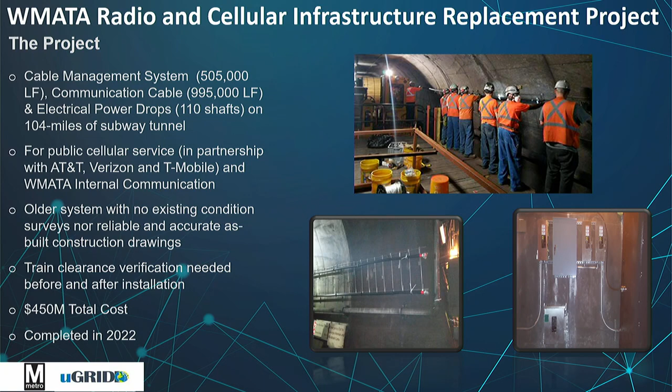The wiring then goes up the shaft and goes to a cell phone tower. That's how you get cell phone service in the tunnel, by making that connection. All right, so we have no existing condition. When they started to explain, yeah, you can go to the next one.

They started to explain their problem with the lengths of the cables and the positions, and immediately, because I was the chief surveyor for like 33 years there, I knew tunnel construction. I knew how the whole system worked. So I said, well, aren't you guys concerned about train clearances? And they go, well, yeah, but we think we don't need to worry about it. I said, well, let's do some theoretical calculations.

And they said, well, why do you say that, Don? And I said, well, do you think it would be a problem if a train hit a piece of cable that was 1,000 feet long and dragged it into the tunnel? And all of a sudden, boom, oh yeah, that would be a problem. Yeah, they could just see the headlines.

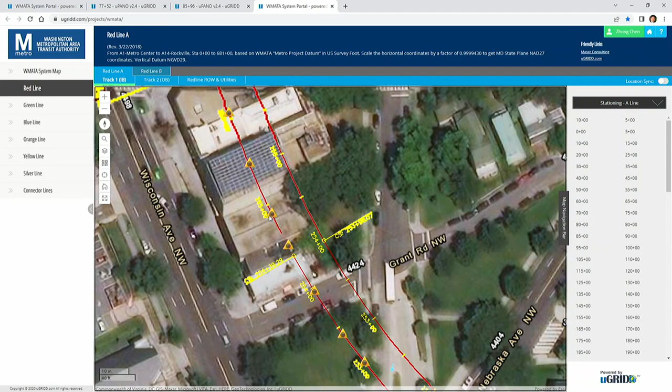So what you're going to see is a simple Google Earth type interface with an orthophoto on top. And there we go. Okay, simple interface and a simple way to navigate. What we liked about this was a normal human being could operate this system. Our track and structures people could operate it. So basically, you see a triangle wherever there's a scan. You see the track alignment. That was all computed by WMATA Geomatics. And then you can navigate.

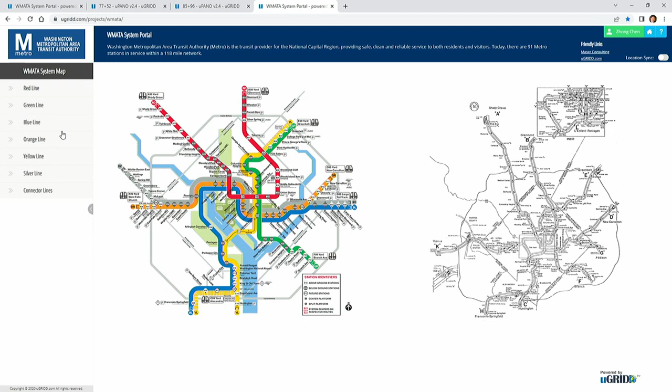Now, Zhong, can you go to the system map for a second? You guys have probably seen this if you've ridden the subway system. This is the map. We have colors for our different lines. So it made sense to use those colors, and so we put a table on the left-hand side of the screen that says, hey, you want to go to the green line, the blue line, whatever. So why don't we go to the green line?

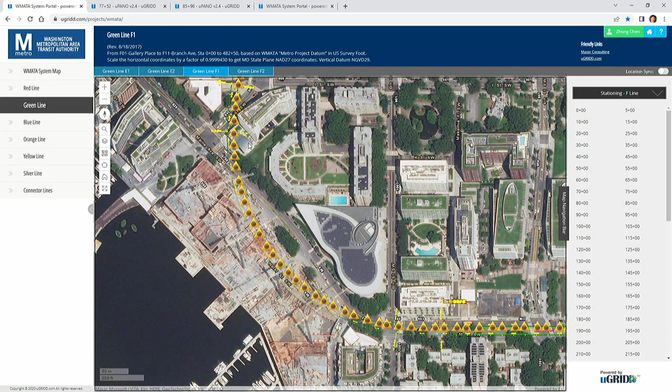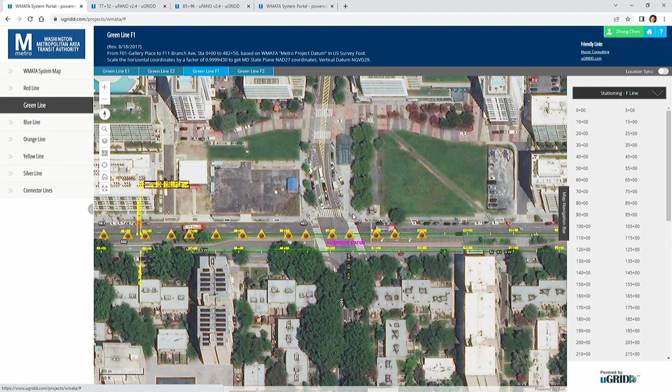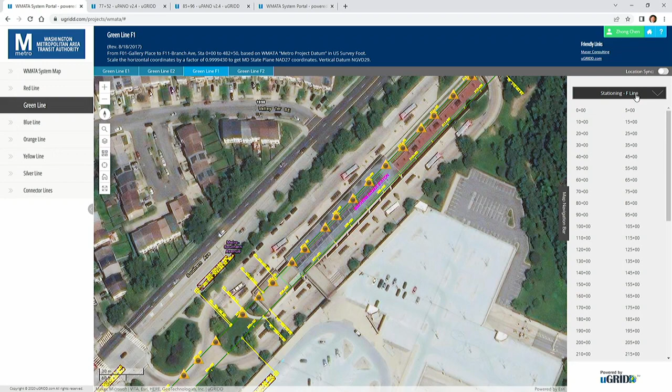And he came up with the little tabs on the top that show you how to get from track 1 to track 2. And then you can also search by stationing out on the right side if you knew what station you were interested in. Or if you wanted to go right to a station platform area, there's another selection right up there to go to a platform. Platforms are shown just superimposed on the surface. So we have 52 miles of dual track, all different configurations, circular, horseshoe, square, whatever. And so let's go underground.

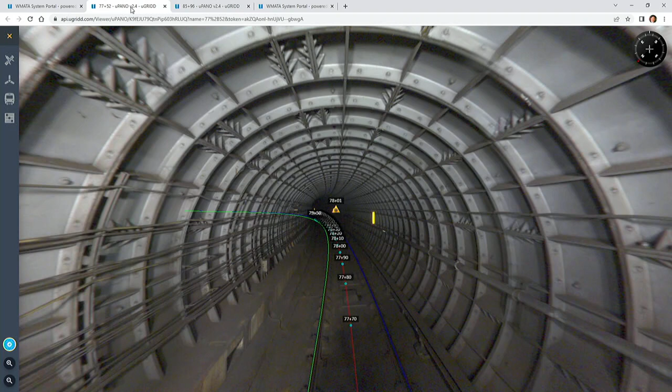So we're just picking the green line just because it's one of the newer sections. This is a section between, actually this is an old section of tunnel. This is a steel liner. And we don't build tunnels with steel liners anymore for a number of reasons. We're actually in the process of replacing or relining the tunnels underneath the Potomac River because they're just failing. So we're removing all the cables. But anyway, here's an irregular shaped surface.

And what you see on the center line of track in red is the center line of track. Stationing for convenience sake is shown every 10 feet. You'll see another triangle way off in the distance, and you can actually jump to that next scan. Now, once in there, now we're seeing a photograph, but right behind that photograph is the actual point cloud. We'll get to that in a second. You can pan left, right, up, down.

What I liked about this was that the people installing the snake tray could view an area and then could say, okay, well, we have track access in this location. Can we put snake tray or this cable management system in that area? And do we have to worry about anything? Because the data acquisition, they came to me after they had started the work. So they wanted to know where they could keep going and installing the management tray system.

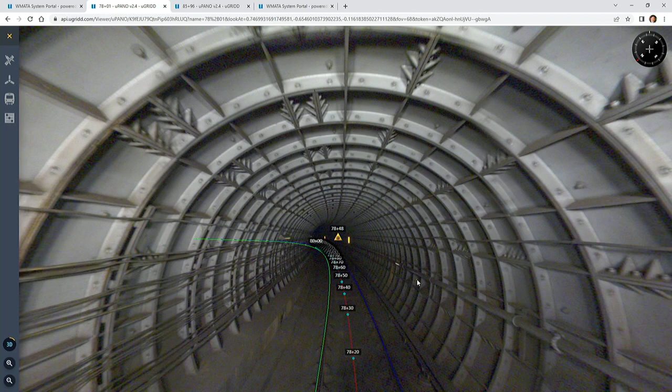So Jean comes to the table and says, hey, I think I can do something with your clearances. So he shows me this. Let's just pick a point, maybe on a pipe or something on the right side. He shows me this. Boink, here comes a station offset. You can see it on the left-hand side of the screen. Station offset and the coordinates of that point on the center line of track.

That's at the top of low rail or the grade profile line. And I can tell that it's a certain offset horizontally and vertically from the top of low rail. And notice that you can't really see it real well there, but that's the clearance envelope just popped up. And the clearance envelope, if you look on the right-hand side, there's a little red dot opposite the point he picked. That's a point radially closest to the point he just picked.

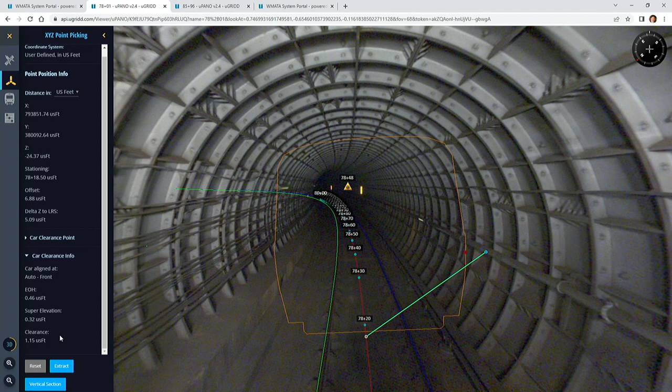That clearance information is shown over on the left-hand side of the screen. And I can't read the dimension, but it probably is in the range of a foot or so. So they knew that they could install the cable tray management system in that area as long as it was above that pipe. So they were able to keep going while the regular design, the 2D design drawings were being created, right?

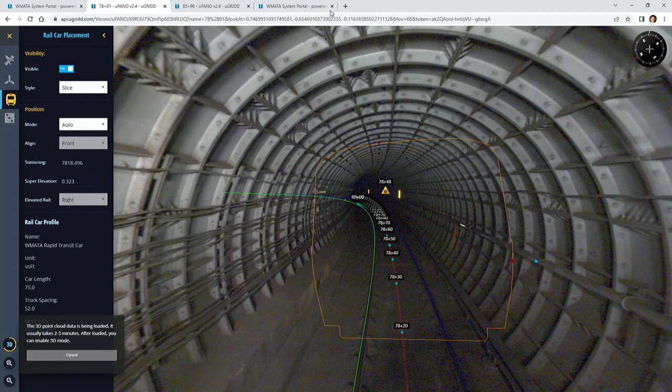So I think the other thing is, can we go to the point cloud? Or can you see it over there? So the point cloud, you could toggle between the photograph and the point cloud, and you got it? Okay. There's the scanner.

So here's the point cloud. Lots of detailed information. When he's clicking on the photograph, he's really clicking on a point behind the photograph, on one of these point cloud points. So this gave a lot of people that wanted to look into the tunnel, without going down into the trackway, the option of seeing what the tunnel looked like.

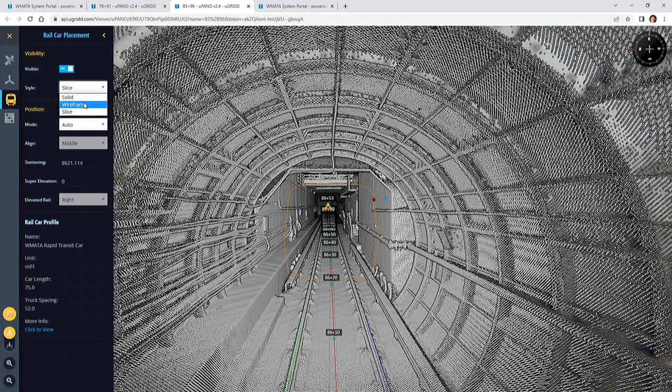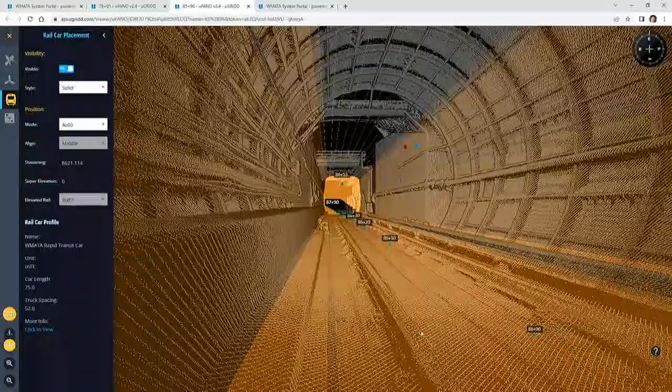Okay, well that's great. So the tunnel, now when we take people underground, and if I was a consultant and I wanted to go look at a small project, I would have to get my project manager to take down the tracks, get escorts, and get me trained and then walk me out there. Then all of a sudden, if Todd's another consultant, he just happens to have another task order, he needs to get down into the trackway. So we saved the authority millions of dollars by limiting the number of people that go into the trackway. Safety is number one at Metro these days.

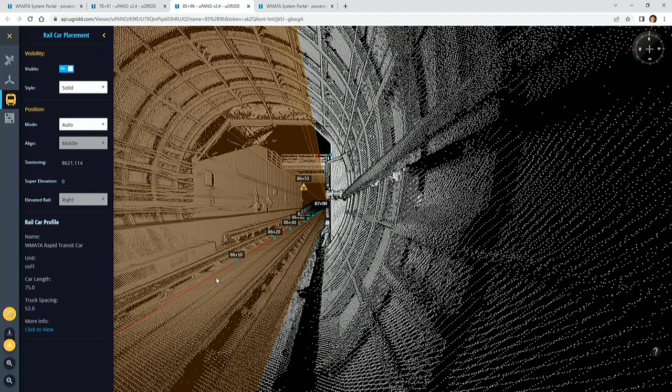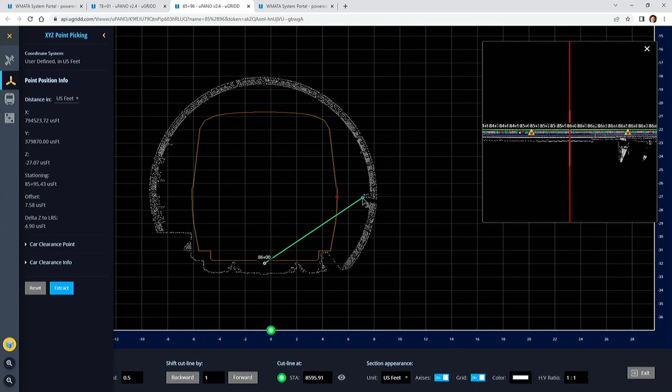Okay, but now we have data that we have to share amongst these 45 different stakeholders. And, okay, thank you. And so, I don't know if you saw, when he jumped from the surface view to the underground view, there was a view button, but there's also a download button. So we end up with 4 terabytes of data. We have to share it with all these different stakeholders.

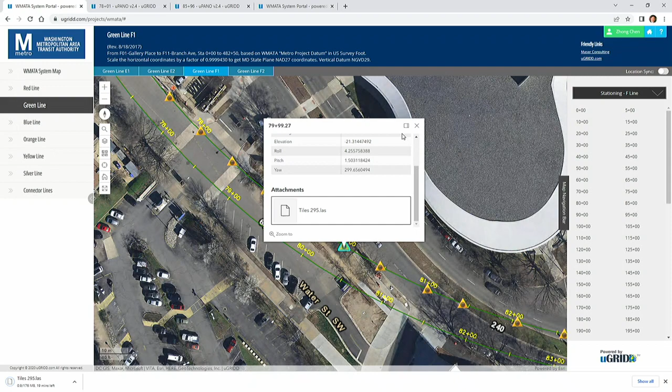Some of them needed the data to do their own design analysis, especially where we were transitioning over the top of a train. And so we found this to be an efficient way to update the data and share it with all the people that needed to have it. So it accomplished that need. Now, for those designs that required the exact computations needed for the length of a cable, that was done in a different system. But the fact is that we were able to order these cables in specified lengths to install them in the tunnel.

So I think there's one more slide, right? Do we have one more? You want to share the story about it?

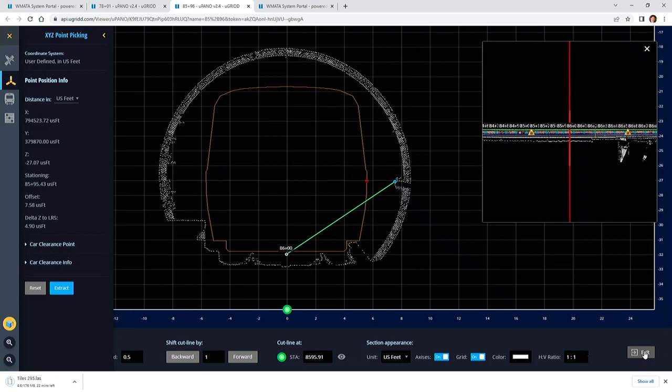Oh yeah. So all this occurred 6, 7, 8 years ago. We started it, and so the other day, somebody calls me up and says, "Hey, I'm looking for LiDAR drawings," and I go, "Well, I don't know what that is exactly, but what are you going to do with it?" And they say, "Well, we're replacing the emergency trip stations throughout the entire system." That's a little box with a blue light on it every 800 feet through the system. You hit the button on this thing and it kills the power. It's not for the general public to be running down the tunnel and killing the power.

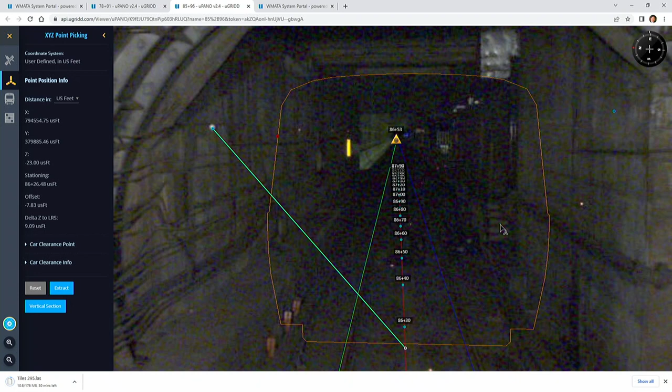But they're replacing them, and they said, well, we need to know, same problem, where we can route the cables and where we can install these boxes while we keep the existing system in place. So 8 years later, we're still using the data. I'd love to have mobile mapped it maybe every 3 or 4 years. We did that mobile mapping project in 11 nights, which is pretty phenomenal once you got everything coordinated. But we had to have exclusive track rights, had to be the first one out of the chute.

All right, is there one more slide? I think we're out of time here.

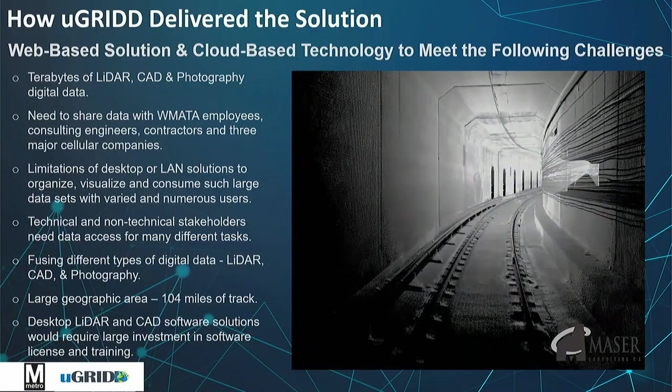Okay, so we're sharing the data with many people. Our track and structures people love this data because they can then look at it and see what the current configuration is. We had this huge geographical area to cover. We didn't do the open sky segments of the Metro Rail. And then we are updating this data with static scans as well as scans being done with an Amberg sled.

I don't know if anybody knows what one of those are, but the Amberg Technologies group has a track sled that you push along that measures 2 million points a second with very serious accuracies. So we're constantly updating the data and we're sharing it. So I'm pretty sure that wraps it up. Is there anything else that I missed there?

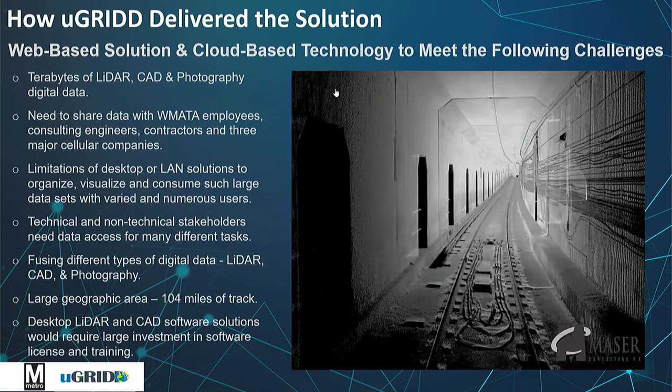So thank you very much. Oh, that was great, Don. Thank you. And as a user of Metro, thank you. I like using my cell phone. Okay. So I think we have time for a question or two for the gang here.

All right. So looking at some of this data, it's integrated with some pretty high-tech survey equipment. What's kind of the entry level if you want to use a system like uGRIDD on the project? Do you need to have full mobile LiDAR, or is there a place you can exist with maybe some high-level scans with some 360 imagery? Is there like a threshold you have to cross to get to that point?

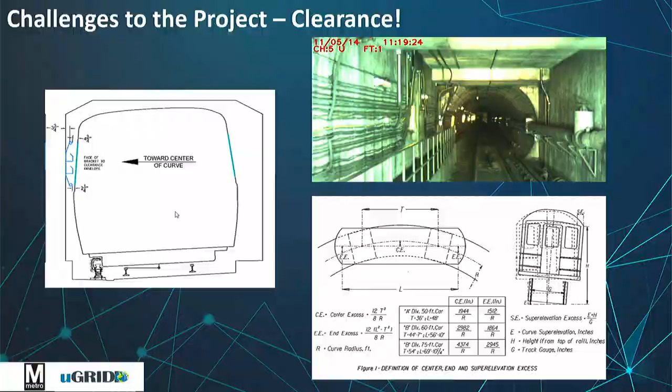From my perspective, anything could be used. A static photograph. The backbone is the alignment. So as long as you can give a station offset or some kind of geolocation on that image, it could be a scan, it could be a PDF, it could be anything. We just happen to be mobile mapping. Now you could go down there with other scanning devices. We did have very sophisticated survey equipment, providing control, plus all the scanning equipment. But we had the justification for the use of that kind of stuff.

But pretty much anything, you could put all your as-built drawings and have them linked to that track as long as you knew where they were. We haven't done that yet. We're just using it. And he's still under contract with WMATA to provide services as needed for future endeavors.

Yes. Sure, David. So I know they've explained it to me, but maybe just for the benefit of others, how does uGRIDD pull the data from disparate data standards, I guess I'll call it, into one place where, based on your need, you can look at various pieces of information? That's my understanding of part of what's happening, right, John? Yes. So how does it do that? It's not IFC based, so how does it do it?

Well, as introduced, I have a consulting background. I'm a licensed land surveyor, licensed civil engineer, and worked on a few hundred of these projects. Then once we started thinking to develop uGRIDD, the trigger was obviously the LiDAR data. And also my consulting practice started doing LiDAR back in 2000, 2001, 2002. So with all of that, how to deliver all of these different data components in one place. So uGRIDD has a slogan, everything is somewhere, namely georeferencing it.

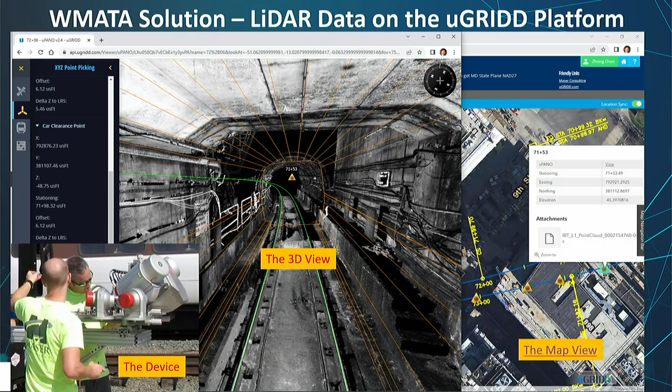All right, next up, we have another great presentation from Austin Holliman and Morgan Ballard from Tennessee DOT. They're going to be talking about culverts. Austin leads a team developing asset data collection, asset condition management, culvert inventory, condition asset program, and also takes care of the FHWA emergency relief program. And Morgan, in addition to administering the call center for the TDOT fix phone number, developed the reporting tools for the new culvert inspection program, and does a whole bunch of other stuff in the maintenance division. So I'll turn it over to you. Get you plugged in and ready to go.

All right, thank you so much. All right, let's see, that came up. Hold on, let's see if we can do this really quick so we can have our notes up here. I made it angry. All right, so I got a mark. Thank you, though. There was one of those things down the floor to help you with the notes, but we got it sorted out now.

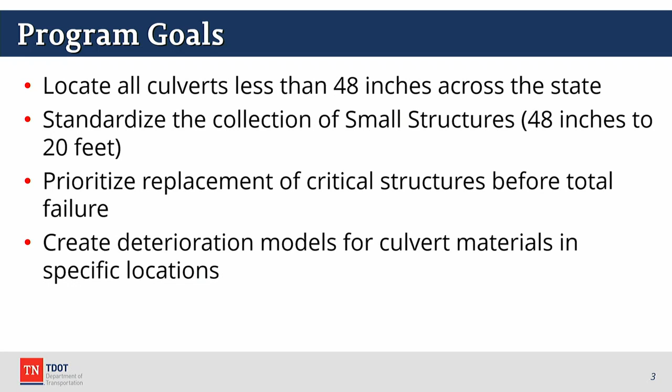One of the things that we really want to do is create a deterioration model for these culverts based on material, based on the location that we're putting those culverts back in. We'll talk a little bit more about that at the end. So we're going to walk through the actual culvert collection process and the major steps that we have in it. So sit back, relax, and let's take a stroll through culvert land.

So the first thing, it's really interesting, but TDOT just didn't have a location of any of these culverts. There was a survey done, I think back in the early 2000s, 2010 timeframe, but it hadn't been kept up to date. There was a couple pockets that had culvert information in spreadsheets, but it was really hit and miss on what you could find out there.

They could see where the ditches were going down into this, and they're like, we think there's a culvert down there. So they tramped through this, and then as a joke, they made me tramp through it when I came out to visit them. They thought they were being funny, and I wouldn't do it. I showed them.

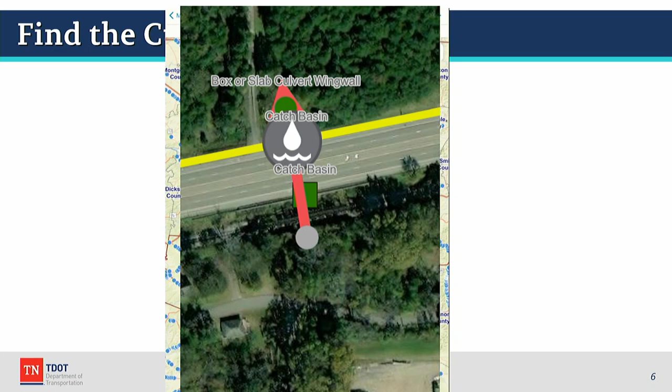We have the inlet, the outlet, if there's any type of catch basins or junction boxes on it. And then we also ask our inspectors if they're from that area, if they know that this roadway floods every time it rains, or if they know that this culvert gets blocked every time it rains. We symbolize by if it has a recurring issue, yes or no. This one they didn't know because they might not have been from that area.

In some of these cases, our geometry is a little bit off. So what we're going to do at the end of this project is start taking the geometry here and bringing it closer together to what it's actually supposed to be out there. But again, at a very high level, this tells you exactly what the culvert's doing, which direction that water should be flowing, and you can lump it in with all of our curb and gutter assets and our other drainage assets collected by LiDAR, and get an understanding of how that water is flowing through a project area.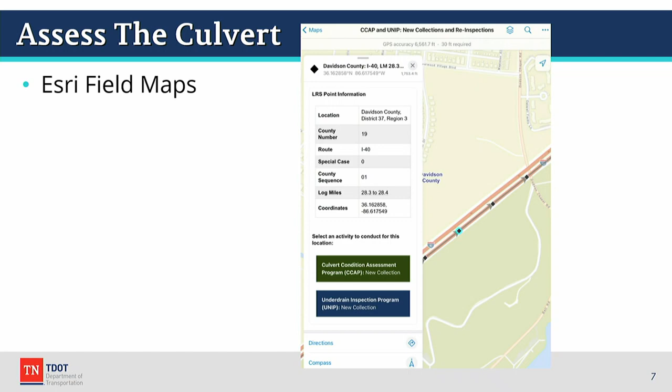When we get into survey, once you click on the launch button here in Field Maps, it takes you right into Survey123. It loads all of that information, and you just go through the inspection. Those are five pages, and you just walk through it. Everything's lined up so that you just answer question after question after question. And if you have maintenance needs or something, it asks you additional follow-up questions as you go through.

We sat down and we spent a year and a half building this application between our field users, Esri, and our office to design this so that it is very much seamless when you're out there in the field.

You don't have—if you're on one side of the culvert, you don't have to leave that side of the culvert until you're done with that inspection. Then you can get up, walk across the side of the road, and go to the other side and do that inspection without leaving that side of the culvert.

You'll notice here that we have colors in our inspection application. Morgan, you want to hold up one of the flip books? So we have a flip book, and we'll talk about this a little bit later, but you'll see these colors here.

These colors line up across all of our materials relating to the culvert program. We have a flip book for our field users to use out there. We have a manual. We have reports for after the fact. But these colors—this green color always means good in any of our documentation.

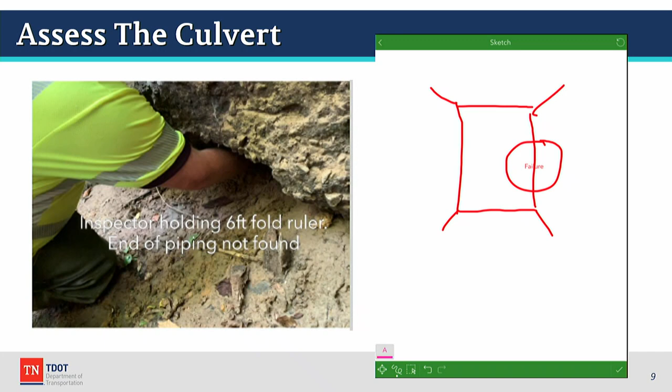Most of our maintenance and construction employees aren't going to get that detailed, but our bridge inspectors are definitely going to be that detailed on certain bridge failures.

So I was talking about the flip book. It also uses photos, so we don't have a lot of descriptions in it. There are descriptions, but for the most part, the photos are what we want our inspectors to use to detail excellent, good, fair, poor, critical criteria. And again, those colors help reinforce cognitive recognition in all of our reference material.

I'm going to show you just a second, and this is a guy we were doing training out near Knoxville, Tennessee. You can see him, he's studiously studying his flip book. But this is what he would see.

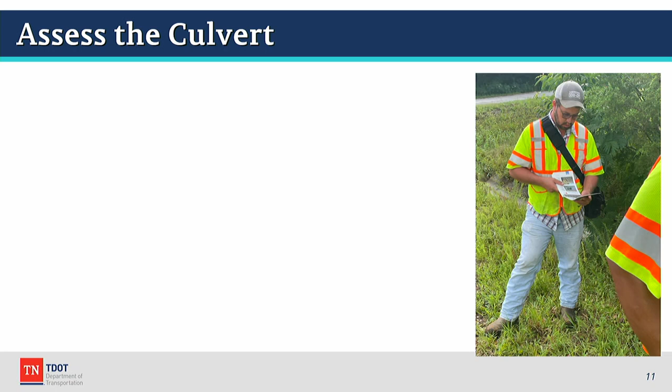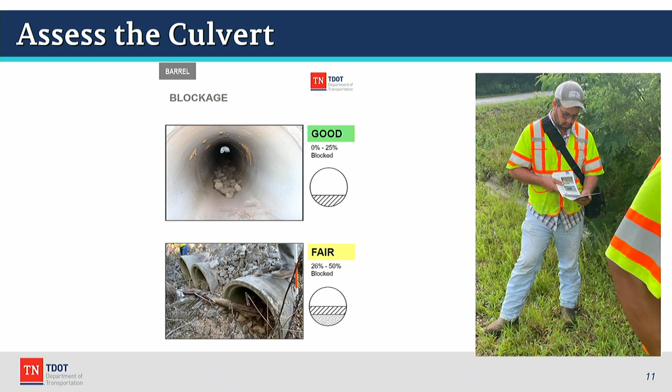But then you see good, fair - it gives you a photo of what both of them look like in a little standard drawing. And then when you get into poor and critical, you get different colors, different pictures and different standard drawings. So it's a very quick, easy visual reference to make something that can be fairly complicated as simple as possible, so anyone can pick up the flip book and take it out there with them.

And we also have a full-size manual that details everything about this program. It's the entire SOP. These are up here if you want to look at them after the presentation.

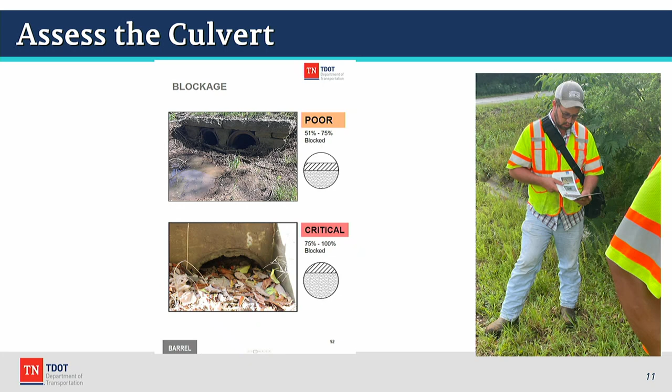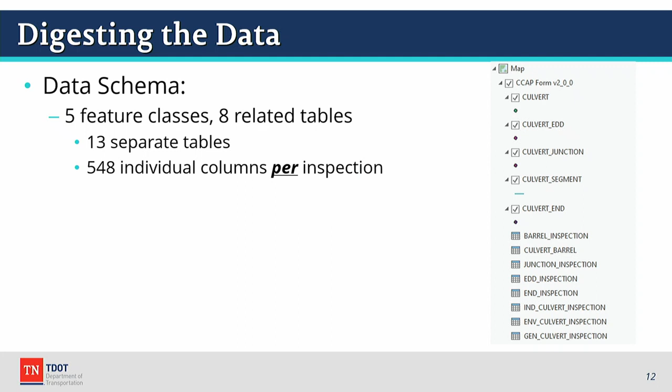You really have to use visualizations here to take those results and put them in a format that anyone can really understand. And the first tool in our toolbox for this is our operations dashboard. This is just a straight Esri product. Hopefully you can see most of it, but the best part about this Esri product too is it's almost real time for us, which is not the case for some of the others. Once the inspector hits submit and that inspection goes into the server, it should show up here in the dashboard within a couple minutes.

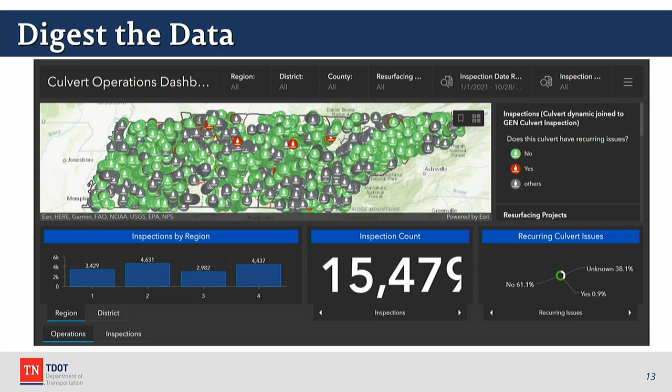You can see all of the images out of this that they have taken out there on the field, and it just gives you some brief statistics about how our collection has been going. Those photos from earlier that were showing the directionality of the culverts, that was from zooming in on this dashboard. And it's basically anytime we have a call, this is our go-to resource.

So now I'm going to turn it over to Morgan, and she's going to talk a lot more about the rest of the visualizations. Not a lot more - you guys won't be bored, I promise.

Hello guys, I'm Morgan Ballard, I'm also from TDOT. Austin, can you go ahead and just click through? I am going to talk to you about digesting the data and specifically the dashboards that we're using, because a lot of places we find we're data rich, information poor.

So it's great to collect all this stuff. It's beautiful, it's fun, we love data, we're data nerds. But if the people can't digest it, we can't utilize it, there isn't a point. So the main things I want to talk to you guys about is who our audience are for these individual dashboards, and then also who our staff are who are collecting these inspections.

So like Austin stated, our bridge inspectors, they're going to be incredibly detailed. They're engineers, so when they're using the Esri application, they will go in depth, they will do things. But our app is designed so simply that a lot of our operational staff who are inspectors - they're brilliant in their own ways. You would not put me on a dump truck and expect me to pave the roads. Don't ask me to, it would be awful. But they can't do the data analytics that we can.

They don't need to understand the math behind it, they don't need to understand the configurations of all of this. They just need to be able to answer the questions yes, no, and have the application keep going through that until the entire inspection is complete. So we've designed everything with the mindset of the lowest entity, which would be our operations inspectors. That doesn't mean they're not brilliant, it just means we go to where they are and we build everything up from there.

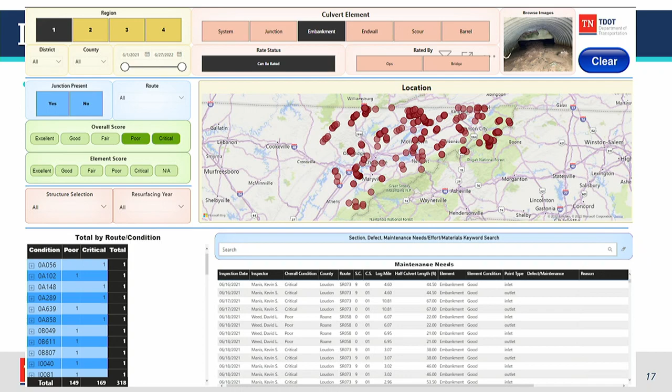You can see here that this embankment is selected. This map right here is only showing locations of embankments for Region 1 that are in the poor and critical stages. So that's how we can do the element rating, but it's a quick view.

I keep going backwards, apologies all.

The next thing you're gonna notice, this is the exact same report, but it's a secondary screen.

You'll see right here, this detailed location is where we were at. That was the map feature. After they do their filtering, they can select and come to this screen, and it will pull up all the photography for those inspections. So if they want an Excel sheet with a list of locations, but then they also want to see the photography like Austin was showcasing, they can, and it will come out to them in mass.

So you will see something, yes. Am I going the right direction?

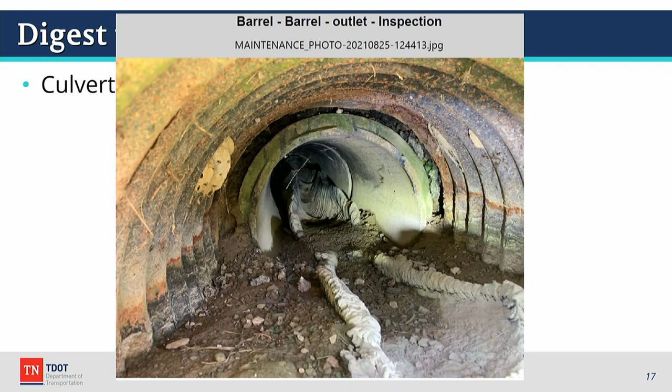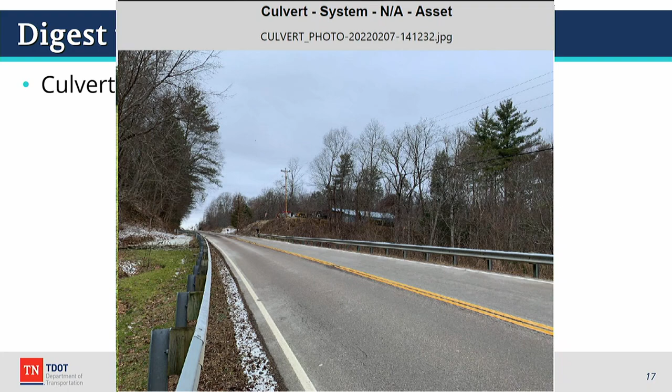You'll see something like this. It says barrel. This is the end wall structure. You will see the culvert system. Do I need to point? Okay. You'll see another culvert system, but it will just generate these photos for them, and it's also labeled.

Do I need to point it somewhere specific?

There we go. All right, I want to very, very quickly go through this because I've been talking longer than I probably should have. This right here, these are all Microsoft Office products, just for understanding. This is Power BI. This report also works with inside Power Automate, and this is a bridge alert system. So if anything, our inspectors go out, it needs a load analysis. So it's an immediate, somebody needs to go back out there.

Our staff are amazing at telling their supervisors and doing that, but this also just gets sent straight to our structures office. And this right here, as you can see, we've only had 4, but this report is basically just a frontline alert. So you don't even have to look through the data. We have those instances in place, and that's what this report is for.

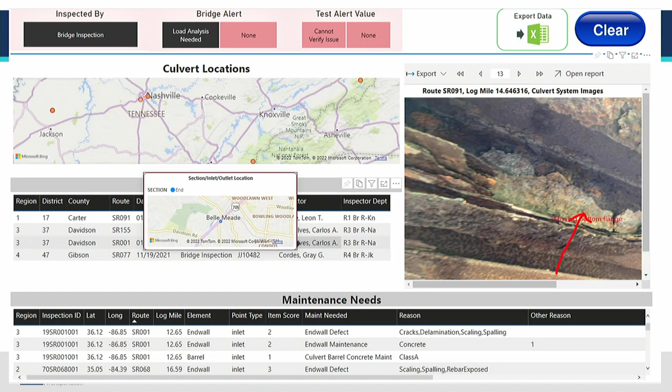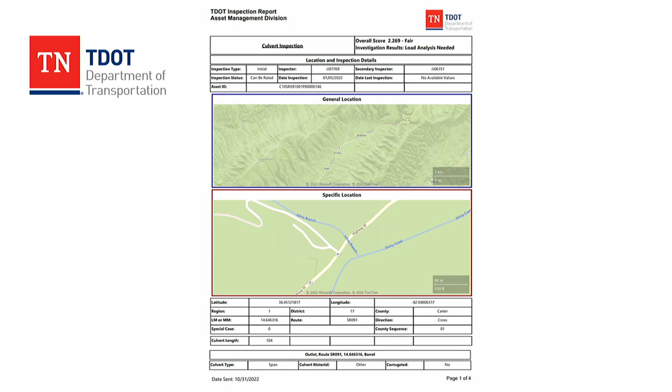There we go. The last thing I want to showcase really fast, this is a Microsoft product. This is a paginated report, and this is the inspection. So if it's a singular report that you're looking for, you can see the singular inspection and, as Austin said, the columns that are entered and all of the photography. It pulls it, sorts it, and puts it in this manner. You can't really see it on the screen, but it's also color-coded to match the flip book.

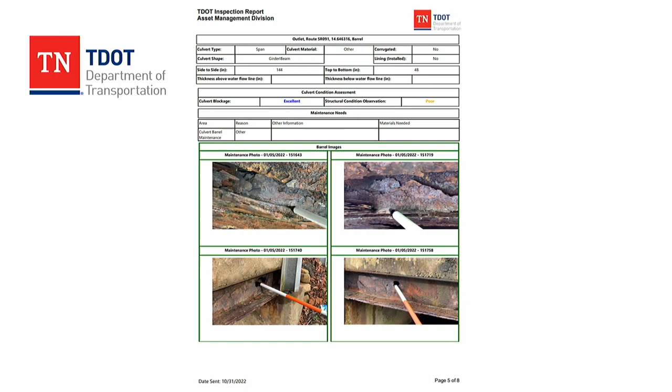So again, it's these cognitive triggers that make it so the field staff don't even realize what they're learning, and it's cueing their brains as it goes forward. So everything we build will have these same hex codes, which it was great that we talked about color theory, but we've built that in already because it's needed. Austin, do you want to go ahead? And then he's going to talk about our business decisions.

And I'm going to be really fast because I know we're nearly out of time. But basically, the end result of this is making business decisions. Basically, replacement material types. We have some old mines in Tennessee that make the water very acidic. You put a concrete pipe in there, it gets eaten out in 5 years, and it's no longer there. So we're looking to build deterioration models about that. There's the federal requirements for aquatic organism passage and bank full width.

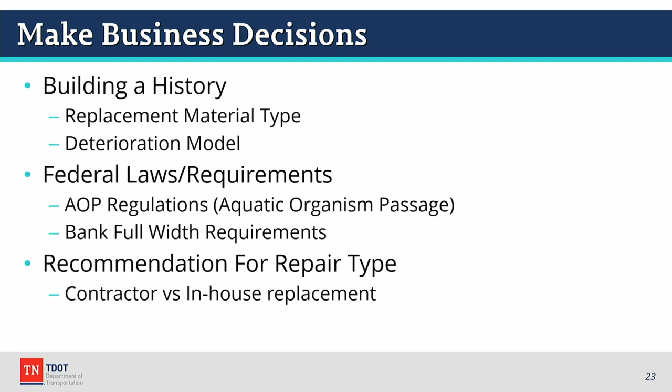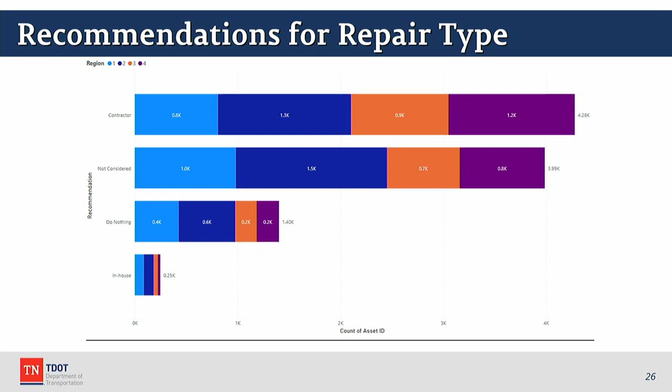And then we're also working, and I'm going to skip ahead to that, with the University of Tennessee, Knoxville to develop recommendations for repair type based on labor data and cost data as to who should be doing the replacement work. This big bar up here is contractor. This one's not considered. There was something wrong with that culvert inspection, and it was rejected by the model. Here's do nothing, and here's the little bit that TDOT can currently do in-house with our current staffing pattern. So you can see this was generated by an algorithm for TDOT to help us know where we need to be spending our money wisely.

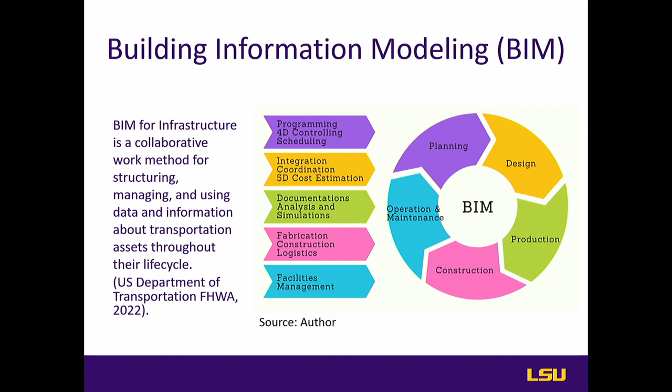Building information modeling, by a definition from the Federal Highway Administration, is a collaborative way to manage data. It is a methodology that can be used in the whole life cycle of the project, from planning, design, production, construction, and operation and maintenance. So visualization can be applied in all these phases. The previous study showed successfully how we can implement these technologies and improve visualization in the operation and maintenance phase.

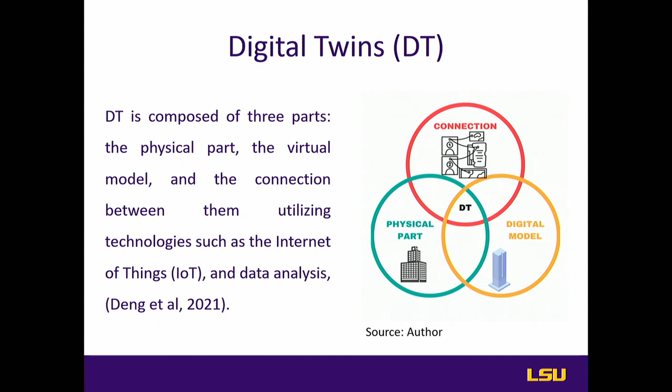And about digital twins. What do we know about digital twins? There are a lot of definitions, so when you start looking into this, you get lost, because these definitions change according to what field you are applying. But the main concept, focusing on the transportation industry, is that digital twins are composed of 3 components: the physical part, the digital model, and the connection between them. Technologies such as Internet of Things, data analysis, sensors and many others can be applied together through digital twins to allow this process.

The steps of this study are divided in 5 steps. The first step was doing a literature review to learn the previous studies and applications of building information modeling and digital twins, especially in the transportation sector. I also developed a questionnaire to apply an online survey. The first questionnaire was developed with 26 questions, it's a bit long. So before applying it, we decided to select 3 questions to test and make a pilot, to see if these questions were well developed and if the professionals were able to share their experience with us.

The collection of data was divided in 2 steps: the preliminary survey and the final questionnaire. Based on this final questionnaire, we will infer conclusions about the situation of building information modeling and digital twins. Here we selected 3 questions: the preliminary survey was composed of 1 multiple choice question and 2 open questions. The first goal is to identify the main benefits of using BIM and digital technologies. It's a multiple choice question, and there is also an option to insert some other option that I did not include.

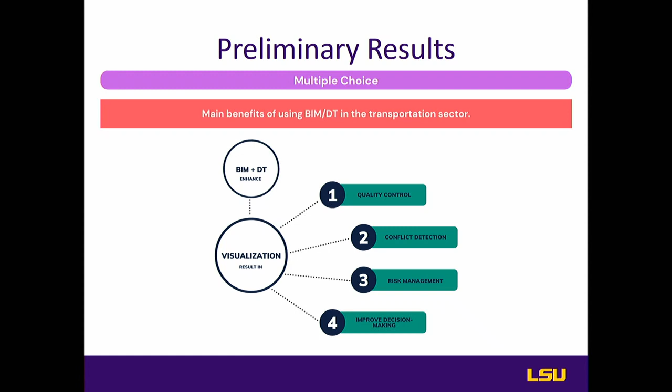The 2 open questions are about the main challenges the professionals are dealing with in these technologies, and how these technologies are changing the transportation sector. From the preliminary results of the multiple choice question, the most cited benefit is that BIM and digital twins can enhance visualization. With this, they improve quality control, conflict detection, risk management, and decision making. The most cited is the improvement in quality control through the visualization of information.

For the open questions, the main challenge cited by the participants is the change of paradigm. We know that building information modeling is more used in transportation and other fields in construction, but digital twins are kind of new, still in the first steps. Some companies and public agencies are not using them yet. So they cited that since it's a new and slow process, there is a little resistance to change, since it changes the whole traditional way to develop projects in construction.

They also cited the complexity of changing from 2D models to 3D models. Sometimes the design team develops the 2D projects, and the construction team has to develop the models from zero, and this takes a long time and can create some errors that were not in the 2D design.

About how the technology is changing the transportation sector, the most cited is how the data is collected. So the transformation is in the information and how the data is collected, how it's processed, and how it's shared. And they also cited the easy information: since we are working with models, all the information is from this model, and you can extract this information automatically, so you can reduce time and reduce errors, not doing it by hand, so you can reduce the human factor of error. So it's also a modernization of the process, bringing digitalization to construction.

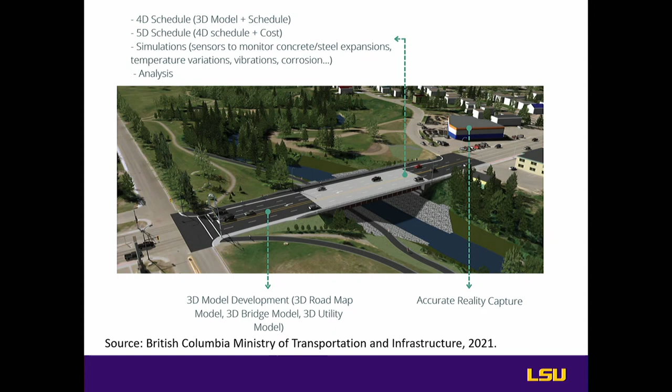Great presentation, thank you. So, questions?

Have you considered or started considering the overall cost benefits of using BIM and digital twins in your analysis? Yes, some of the questions in our final questionnaire are related to the cost, or whether they are considering the return on investment. So I don't know if it's exactly what you are asking, but yes, we are considering it, especially because digital twins require more technology and more investment. So yes, we are considering this.

And some of the participants also mentioned this. It's not the large part, but some professionals think that it's not the best way. They cited the high cost and the lack of professionals who know how to use this technology as one challenge. So training these professionals will always increase the cost of implementation. So that is kind of the negative point of the process, but we are considering this as well.